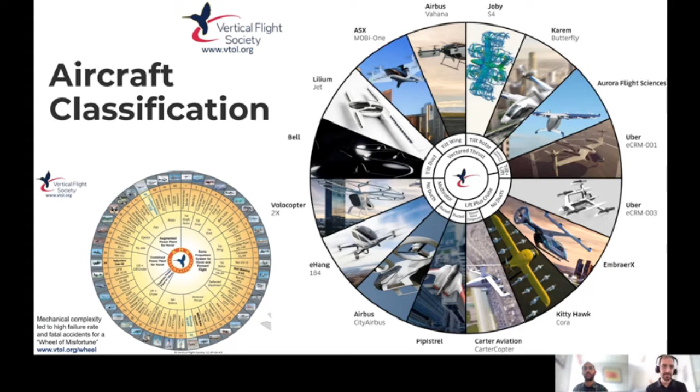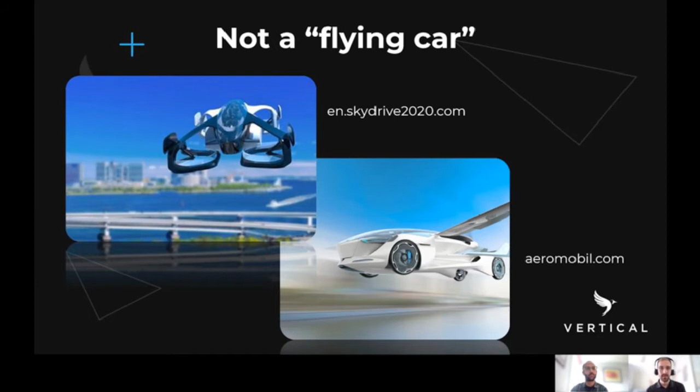So this is new, this is novel, and there are a lot of challenges ahead of us. I'm just going to quickly list down some of those challenges that are presented.

So the first one is public acceptance. There's potential that these things are noisy. There's the whole kind of not-in-my-backyard objections that you may get in areas where these aircraft are utilised quite heavily. And then there's the perceived safety - people aren't going to use these until they know that they're safe and proven to be safe.

Second area of challenges is around infrastructure. Do we need specific vertiports? Vertiports are kind of akin to a heliport, but have the specific charging needs for these. We know that electric cars are going to become ever more common, so we need a grid that can provide the power to charge these. eVTOLs are just the same - they need quite high power to enable quick charging.

And the third, and by no means least, is air traffic management. So the vision is that there's going to be lots of these aircraft flying around, so it's going to be potentially congested airspace. They need to share that airspace with existing users, and it's highly likely that there's going to be smaller autonomous systems, such as survey or industrial drones, acting in that same airspace that all needs to be shared. So we need this overarching air traffic management system to ensure these are safe.

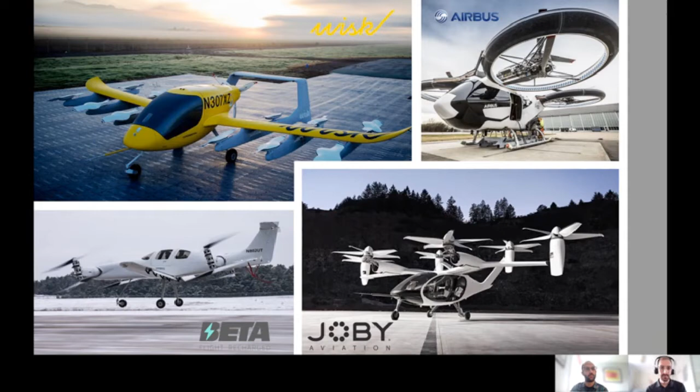You've got the shorter range, kind of more simple aircraft, which are potentially suited for intra-city - so that's really quite short range, not quite river hopping, but perhaps a more shuttle service. And then you've got the longer range aircraft, which tend to be winged for the increased performance in cruise - a bit faster, higher performing aircraft, but with that comes some complexity.

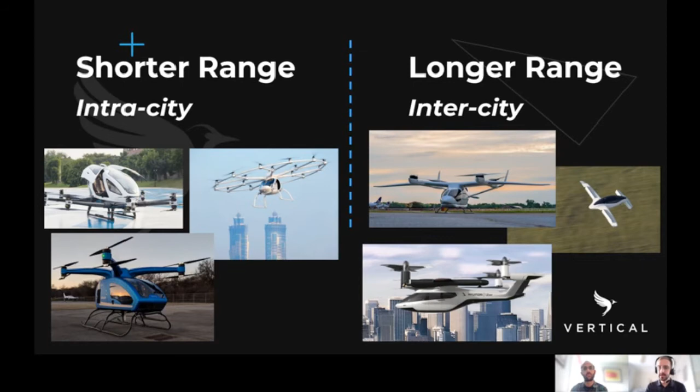So that's the kind of background and some of the competitors out there. I'll now kind of focus back to Vertical Aerospace. So I'm going to cover the journey so far.

So Vertical Aerospace has been going about 4.5 years, maybe a bit longer. James and I were fortunate enough to join very early doors, so we were employees number 4 and 5, started in 2016. Company was founded by tech entrepreneur Stephen Fitzpatrick, founder of Bristol-based OVO Energy. At the time that he started the company, he also had Manor Racing, the Formula One team.

And from his kind of involvement in the energy business, and particularly the renewables focus, and seeing some of the high power technology, particularly around the hybrid powertrains that were in Formula One, he wondered if they could be merged together to form a new method of transportation.

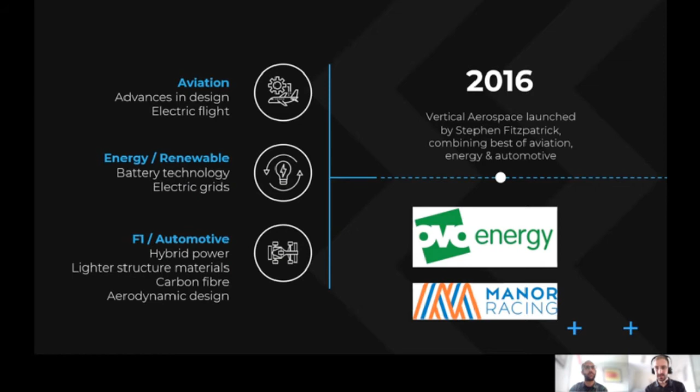So in 2016, we were set the challenge to make the first eVTOL aircraft for the company. That was called the POC, and I'll cover that in a little more detail. In 2017, we had its first flight. In 2018, we put a body shell on. The company was larger by that time, about 30 engineers rather than the 6 engineers who designed the POC aircraft. Then in 2019, we flew our second technical demonstrator, Seraph. Its internal name is HRD, so if I inadvertently refer to it as HRD, you'll know the aircraft I'm talking about.

In 2019, we were about 70 engineers. I'm not going to cover 2020 too much - I'll leave that to James to cover the next aircraft we've been working on. But I will say now we're over 100 employees, split across 2 sites in Bristol and Oxford. In 2019, we joined forces with Mike Gascoyne Industries. Mike's an F1 veteran and has brought a lot of F1 experience, supply chain, and ways of working into the company to enable us to move quickly with the newest technology.

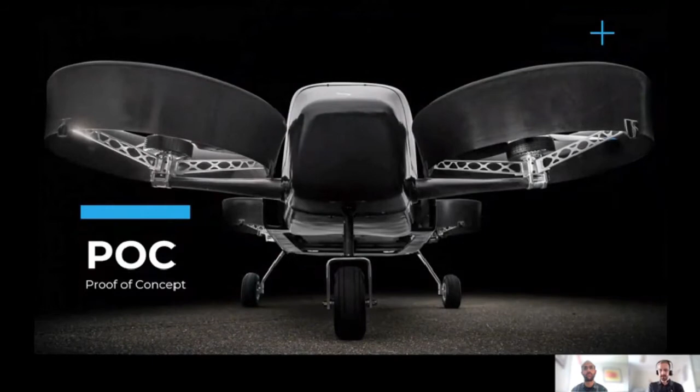So here's the POC, proof of concept is the acronym, and it was exactly that. There are 4 main reasons why we built the POC. One was technology readiness - just to understand if our battery's good enough, our motor's quick enough, to check the state of technology and its suitability. The next one is multi-copter scaling effects.

This is a really interesting one - small drones are highly maneuverable, large drones not so much. So we were trying to address some of those scaling challenges we might have, going from grams to single figure kilos to aircraft of a ton or greater. And how do the physics stack up?

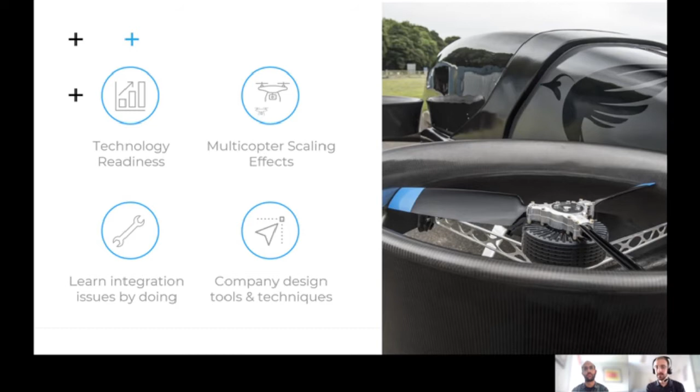The third point is learn integration by doing - it's often great to learn by doing. And then finally, to start developing the company's design tools and techniques. We were only six people at this time, but we had that eye for the future, knowing that we need to be designing a certified aircraft sometime down the line. So we needed to develop those ways of working.

So here's a cutaway of the aircraft, some basic stats. With its bodywork on, it was approximately 3/4 of a ton. It was powered, or lifted, by 4 off-the-shelf ducted fan units and motors and drive systems that were again all off the shelf. Now the battery was bespoke, so you can't get batteries of this size easily available as one-offs.

So we chose an unusual chemistry for this battery - lithium iron phosphate, which is great for power and great for safety. It's not so good for energy density, so we consciously made the decision to have a reduced flight time to ensure that, A, we could take off, and B, if we were to have an incident, it would be safer.

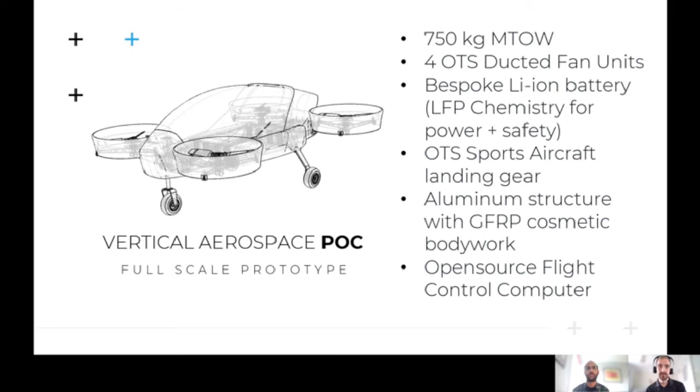The undercarriage, again, off the shelf from America, I believe. The structure was a welded aluminium space frame for lightweight. Later on in the flight test program, we installed a glass fiber cosmetic bodywork on it. And then finally, we used an open source flight control computer - prosumer grade flight control sensors that are readily available, with lots of good support as we needed.

So to talk through the test approach - fairly conventional product development cycle really. We did quite a bit of simulation up front, and some subscale modelling and rig testing. Then once we had the aircraft, we did some tied down testing, some loose tether testing, and finally some free flights of the aircraft. But it's not a purely sequential activity - we often looped around some of those as we learned.

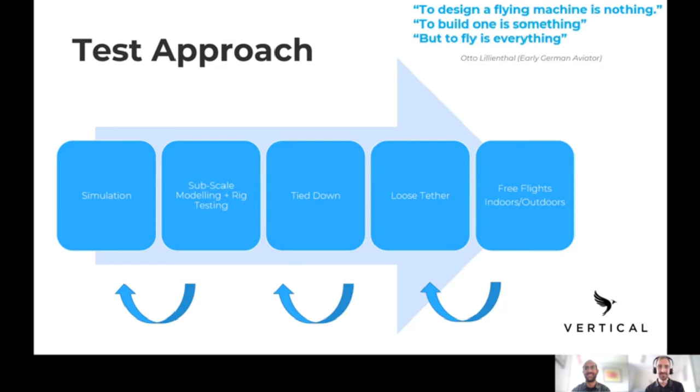So one of my favourite quotes is up here: 'To design a flying machine is nothing, to build one is something, but to fly it is everything,' from Otto Lilienthal. He did die in a hand-built glider, but it's still a really good motto there - the best way to learn is to build it and to fly it.

So here's one of the rig tests. We tested one of the ducted propulsion units, A, to check that it matched its claimed performance, and B, to look at some of the ground effects the aircraft may have exhibited. So we had the scaffolding rig to look at the performance at various different heights above the ground.

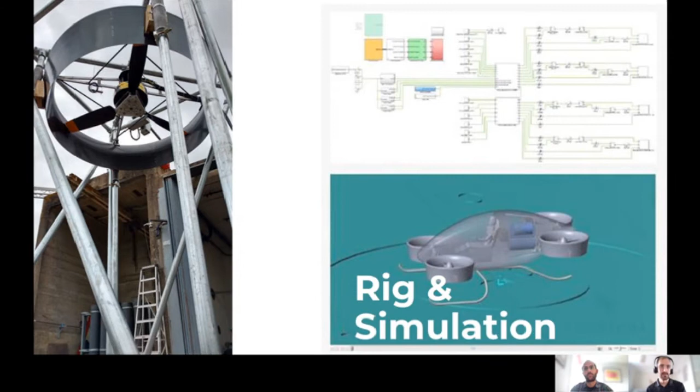And then there you can see some of our kind of Simulink modelling that was carried out to look at load cases, performance handling, and to be used for pilot training in some aspects as well. We did try to get the flight physics accurately captured, but we had some challenges getting the control laws into the simulation environment.

So we decided that performing a comprehensive subscale test campaign would be really valuable to tune the flight control laws. So here's, I think, our company's second drone. It's approximately 20% scale to the full-size aircraft, and we tried to target a similar centre of gravity, a similar undercarriage footprint, and get the thrust-to-weight ratios correct for both the whole aircraft and for each motor.

But our biggest concern was around responsiveness. I mentioned before the scaling - the inertia obviously scales quicker than the thrust for these vehicles. So we were finding ourselves phoning motor and motor drive providers saying, we need to slow down these motor control units, whereas people often phone up and say, hang on, we want it quicker to have our drone more nimble.

You can also see we've got this large kind of cruciform frame which we suspended masses on the end to again get that inertia really quite high, to replicate the motion of the larger aircraft.

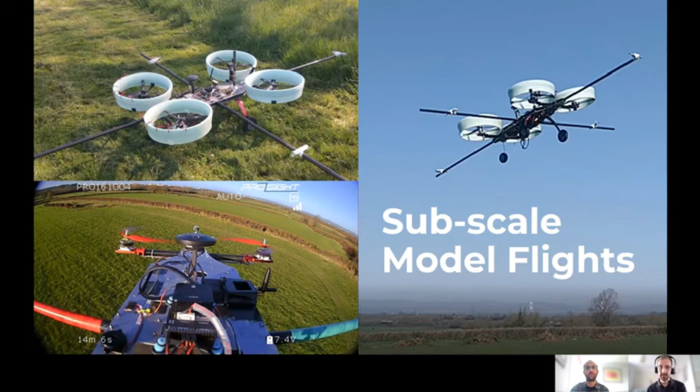And we performed these in both common throttle, so we coined this the term 'dumb hover', where you just command a common throttle to those motors. And then we did some intelligent hovering, where the flight controller is responding to those motions of the aircraft.

We did actually then venture and do a single degree of freedom tuning, where we constrained the aircraft so that it could pivot about its rear undercarriage, to assess that degree of freedom's control loop. Really quite invaluable - you get to stress test all the systems whilst being at a safe distance from the ground.

So off the back of that tether testing, when we had enough confidence that the aircraft would behave, we started the free flights. So we did this both indoors and outdoors, to escape the weather sometimes. And we did it with and without the cosmetic bodywork. That bodywork was actually quite heavy, so we had to kind of retune some of the flight control laws whenever we installed that.

So what did we learn? Summarising four big lessons learned from that project. One was around airframe deflections - these need to be considered. As the aircraft is stressed, it would obviously deform, resulting in different thrust vectors, which for a quadcopter like the POC can be quite significant.

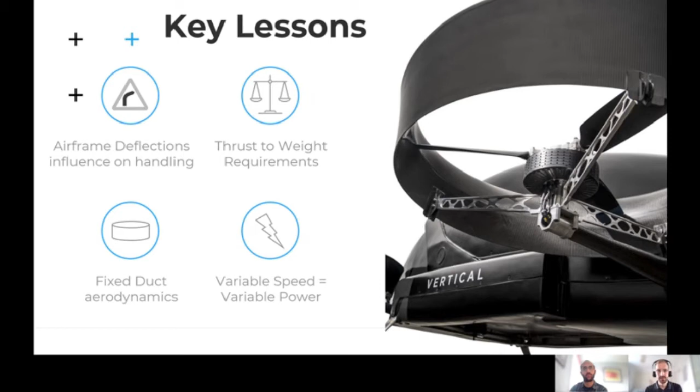So next I'm just going to show a quick video of the POC flying. This was flown at Cotswold Airport in Kemble. There is a longer video on YouTube - this is a short one.

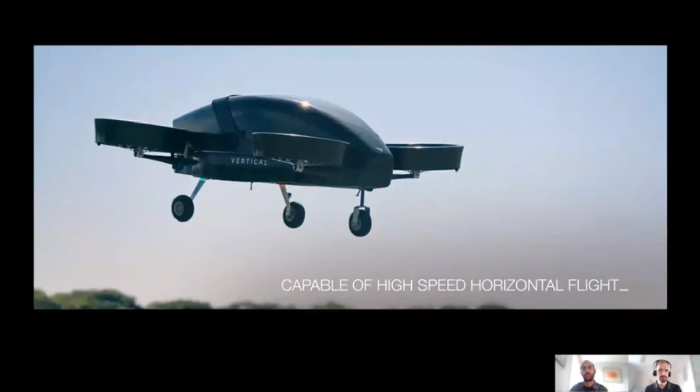Okay, so after the POC came Seraph, or its internal name was HOD, if I accidentally refer to it as HOD. So quite a bit different from the POC, yet still a multicopter.

So the key design differences: it had 12 rotors rather than 4. These were actually arranged in a hexcopter configuration, although those two rotors were overlapping and contra-rotating. We had a much lower disk loading, so we had more rotors, bigger rotors, giving us a payload capability, whereas the POC didn't have any.

And we really wanted to start exploring what it takes to make the low voltage, or the other power systems, redundant in the aircraft, because this is a must for certification. So again, it was an iterative step from the POC. This wasn't necessarily meant to be a product.

Arguably, it could be used for some autonomous cargo missions, or maybe that shorter range intra-city flight. But we still had our eye on a more performance-based aircraft.

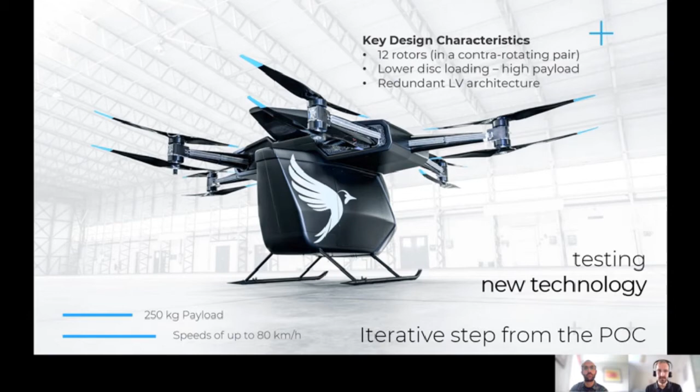So the four focuses of this one: one was to start understanding how open rotors behave, both dynamic vibrations, thrust performance, noise, etc. The second point is redundancy testing. This was what we referred to as the golden mission for this project, to prove that the aircraft was capable of safe continued flight with a motor failing. I'll talk a bit more on that later.

Payload capability - we have to have an aircraft with a payload capability. It's pretty obvious, and this was our first chance to look at the difference in flight behaviour with and without a significant payload. And this one's the same as the POC, but we needed to develop the company's design tools and techniques and provide validation data for some of the digital toolkits that we were using.

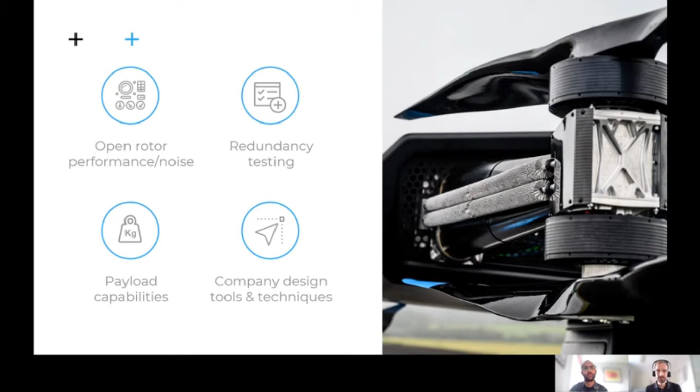Some people are quite surprised that we use wood. Why not carbon fibre? It's actually quite cheap and quite quick to get hold of these rotors, but it's also a really good material. It's got good damping properties and good damage tolerance. So the blades we selected for that reason.

So the flight controller issues a command - it wants this motor to particularly speed up. The motor in itself and the control unit there has its own control, closed loop control. So we needed to make sure that those two systems weren't fighting with each other. So we spent a lot of time ensuring that those motor units were tuned to really perform as expected.

On some of the earlier runs, we were seeing kind of steady state errors and creep in error over time, which wouldn't have been acceptable for flight.

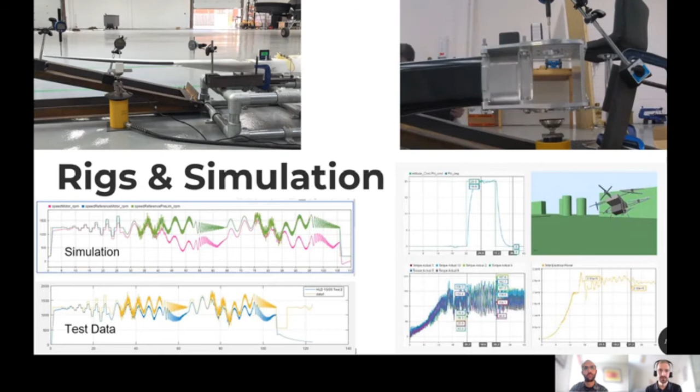So as before, tried to keep it as representative as possible. We put a data logger then on this scale aircraft, so we can actually extract some of that data and understand how those models compared to the real world performance.

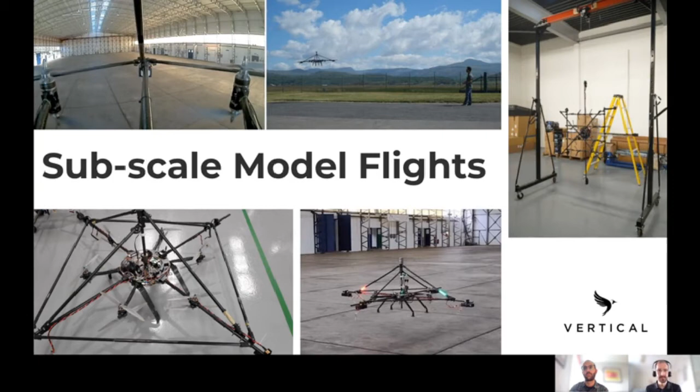And yeah, the drone's hanging there in that gantry, and that's just us measuring its moment of inertia for scalability reasons. So once the aircraft was then built, and Seraph was ready, we performed some tethered flights.

So on the left there, you can see a festive looking shot where we were tied down to the floor with some load cells. So we were again measuring the thrust margins that we had and the centre of mass.

And then we moved to Llanbedr in North Wales for our flight test venue, but we also did some tie down and some loose tether testing there.

So here you can see a video of the aircraft without its bodywork on. I think we had about 30 centimeters of slack in that test. So you can see that it's a little bit twitchy. It's quite a compromise.

You want to ensure that your tethers are loose enough so that they don't interfere with the flight control laws, and you don't get significant snatch loads which can confuse the control system. Of course the tethers are there to protect the aircraft, so you have to make sure it can't topple. So we went through a few different iterations of that tethering.

You might notice on this video that the top frame looks a little bit wobbly. Off the back of some of this testing, we did determine that we needed to make some structural reinforcement, which significantly improved the flight performance of the airframe.

Once we had the confidence we were ready to go, we incrementally started the flight test campaign. We started without any bodywork - it's the safest condition, there's less power required to hover, and we actually installed a stabilising platform. You can see there on the top left, just to give extra protection from any potential toppling issues.

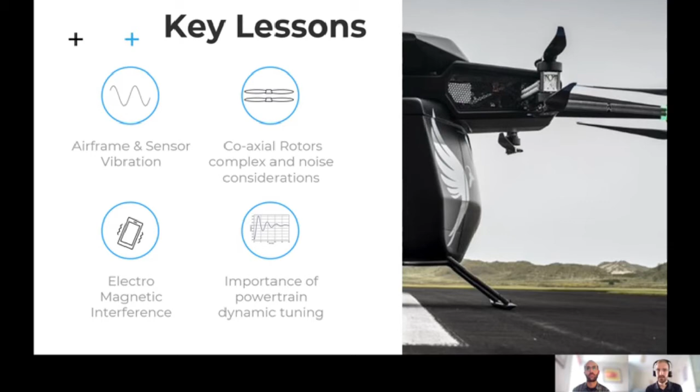But next I just want to show you an exclusive video that we've created to show one of the deliberate motor out cases we performed towards the end of the test campaign. Did this about a year ago, and again it was fortunate to have a sunny day at Llanbedr.

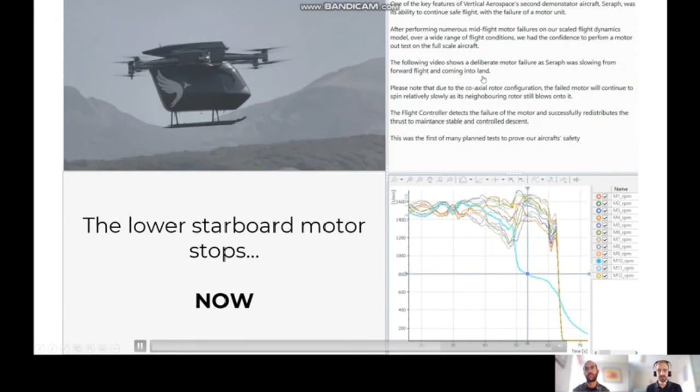So it happened in a few seconds. And it's about now that it's failed. So you can see it windmilling down. It never comes to a complete stop because it's still being driven by the rotor above it.

There's very few failure modes that would result in a kind of complete seizure of that rotor. But the key thing to observe here is that the aircraft carried on its flight. It was very undramatic, and the pilot still had sufficient control to bring the aircraft down on the runway.

We did quite a few of these tests. We did a lot more at scale through kind of more risky conditions, looking at all sorts of different permutations. But the main key here really was to get that experimental data to validate our methods.

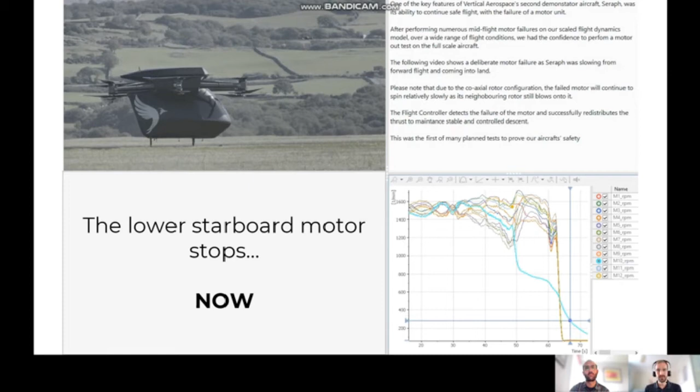So that was a very quick summary of where we've been and how the company was created, the market that we're looking to get into, and our two technical demonstrators. I'm now going to hand over to James Peck to talk about the future.

Great, thanks, Simon. Before I do talk about the future, I think it's worth looking back again at the timeline that was shared at the beginning of the presentation. Oh, there we go. Sorry.

Until recently, we've only publicly shared the work we've been doing on multicopters, but we've actually been working on winged eVTOLs for quite some time. Whilst we only unveiled the VA1X concept a few weeks ago, this is something we've been looking at for quite a few years. It was as early as 2018 when we first began investigating a winged eVTOL concept, and we began engaging with the EASA around October of that year.

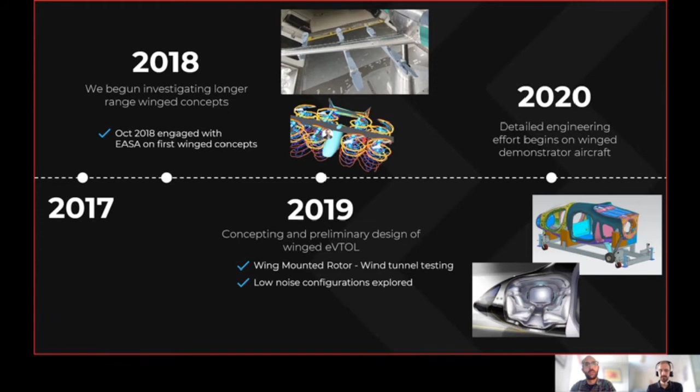We spent a long time exploring the design space, conducting wind tunnel tests of wing-mounted rotors, and a significant number of numerical studies to identify what the optimal configuration looked like. All of this was in parallel with the Seraph program. But in 2020, we began refocusing the majority of the engineering effort into designing our first winged eVTOL prototype. We're already a considerable way into the design of that aircraft, and we hope to show off the hardware for that prototype next year, along with demonstrating a first flight in the second half of the year. That will lead straight into the production aircraft and the certification program.

So why the shift away from Seraph? Well, Seraph satisfies a particular market, but not the urban air mobility market, and it's that market that we really want to target. The potential for urban air mobility is huge, even today, and it's expected to grow significantly more over the next 10 to 15 years.

Basically, cities are becoming larger, and there are a growing number of megacities around the world, for which the existing ground-based transport options are just proving inadequate. That's reflected in a recent resurgence of helicopter passenger flights in cities like New York, Mexico City and Sao Paulo. Incredibly, in Sao Paulo alone, there are already over 1,000 helicopter flights per day. And these are noisy, polluting vehicles based on a technology that hasn't really changed much in half a century.

Recent technological advances allow for far more efficient, cleaner and quieter vehicles to solve these problems. That opens up a potential new market where helicopters haven't previously been allowed because they've been less socially accepted due to noise. So what makes a good eVTOL concept that can compete in this UAM market?

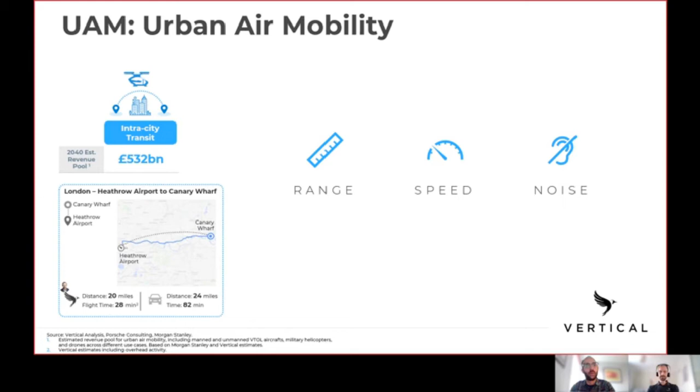I think Seraph was a fantastic learning tool, as Simon's pointed out, and its elegance and simplicity meant we could get that learning very quickly. But to enter into the UAM market, it became clear that we needed a different aircraft.

And at some point, that maximum takeoff weight becomes large enough that the batteries simply can't provide enough power to get you off the ground, and it's no longer feasible.

Now, for a conventional helicopter or a multicopter like Seraph, you'll struggle to achieve an L over D of much greater than 5, which with today's battery technology simply won't give you enough range to operate a UAM service. Conventional tilt rotors, whilst they're designed for speed and are more efficient than helicopters at that speed, still struggle to achieve a high L over D because they have heavy engines mounted on the wingtips, which puts structural constraints on the practical aspect ratios of the wings.

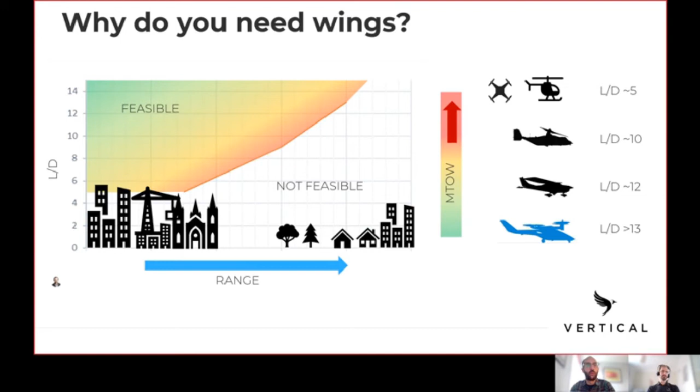A modern GA aircraft can achieve L over Ds of between 10 and 15, and that's around about where we're targeting. We're targeting L over Ds of greater than 13, and you can only really achieve this if you generate your lift from a wing during cruise, and ideally an optimized high aspect ratio wing.

So if winged aircraft are better, why isn't everyone developing them? Well, firstly, you have to carry the additional structural mass of the wing, and that can be quite significant if you intend to spend a significant time in hover. But provided your expected ConOps don't require you to spend long in hover, then the wing mass quickly pays for itself.

More importantly, though, to really gain that increased performance, you need to increase the complexity, such as having tilting rotors and aerodynamic control surfaces. That's a difficult trade because complexity drives cost, particularly in certification cost, which all needs to be accounted for in the operating models. So ideally, you want to end up with an aircraft with the best performance but lowest complexity, and that's what we've been striving for.

But despite best efforts, it's inevitable that this type of aircraft is going to be more complex than a simple multicopter. There's an assumption that some people make that simplicity equals safety, and therefore a complex aircraft will be less safe. Well, that's not always the case. Modern passenger aircraft are among the most complicated vehicles ever built, and they're also among the safest. That's because the safety has been architected into them. That's what we've been aiming to achieve. We've designed an architecture that has built-in redundancy and high reliability despite the complexity.

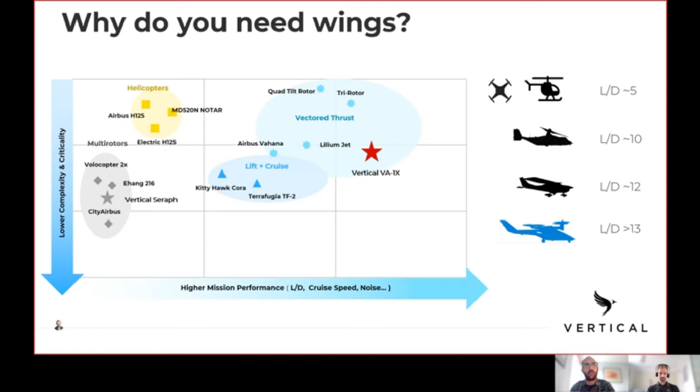That size is necessary to increase the disk area of the rotors, to reduce power and noise as mentioned before, and to increase the wingspan to maximize the aspect ratio. There is an upper practical limit on the size to allow continued operations from existing heliports, so the maximum footprint is still constrained.

We've got 8 rotors, 4 of which can be tilted for transition and cruise. From a redundancy perspective, we can tolerate any single failure, be it loss of thrust from a rotor, loss of tilt actuation, hard over control surface failures, or battery pack failures. We're in the process of generating the evidence to demonstrate this to the authorities at the moment.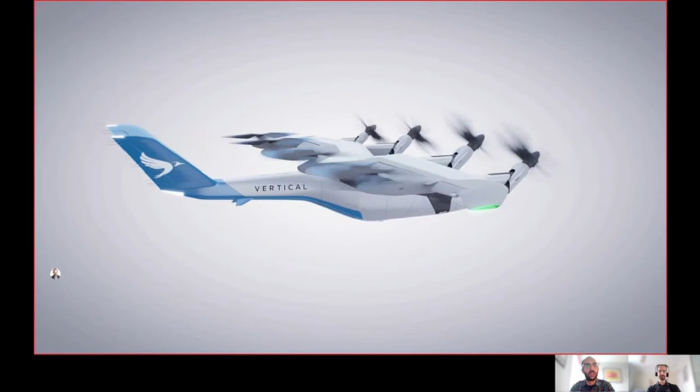You'll also notice that the aft rotors are actually 4-bladed scissoring. You might think this is unnecessary complexity, but again this comes down to the trade of performance versus complexity. In the case of a UAM vehicle, low noise is essential, and that drives the need for low tip speed, high solidity rotors that need to be multi-bladed essentially.

It's because of all this effort we've put into optimizing the aircraft - the wing loading, pylon size and shape, rotor positions and so on - that we can achieve an L over D comparable with a high-performing GA aircraft, which crucially gives us a viable mission range with today's battery technology. That's important because battery technology is not advancing as fast as many people would have you believe. Furthermore, it takes many years to get that battery design certified and onto the vehicle.

We've actually already begun that process, performing a number of drop tests and flammability tests that have been witnessed by EASA. Some of the key features you'll notice on the aircraft are we have a high wing and quite large doors. This is deliberate to make the vehicle more practical to use.

If you look at many GA aircraft, getting in and out is not that glamorous. We want a high throughput of passengers, and to make this accessible to all. Being able to get people in and out quickly and safely is again critical to this being a successful UAM vehicle. Now, hopefully that's given you a high-level insight into how we've arrived upon this aircraft.

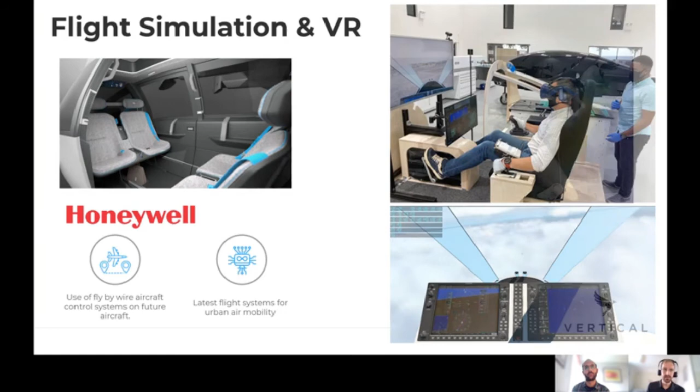Throughout this talk, we've talked quite a bit about noise and performance. One of the reasons we've changed to these, like James says, the highest solidity and low tip speed rotors is to try and minimise that noise. But there's some really interesting interaction effects with the wing and with the rearward rotor, so we're doing quite a bit of scale testing, quarter scale and somewhat full scale, to get an idea of some of these effects.

In our experience, we've found it's quite easy to get the performance of these, but to actually predict the noise is really quite different, so quite difficult. We've got a few tools and methods, but we're really trying to validate those experimentally so that we've got confidence that our aircraft will be quite smooth, with no induced vibrations to make the passenger experience not optimal.

So we've already started running some testing for this. It goes without saying we'll be doing some wind tunnel testing in parallel, and James showed some of the pictures earlier on for some of the wind tunnel testing we've done to date on previous concepts.

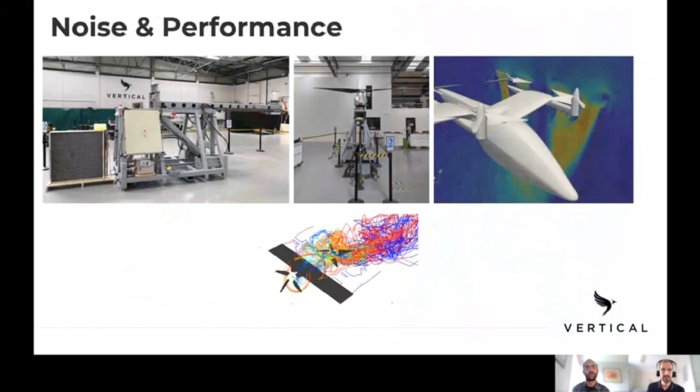Not much to report really on the test program. It's going to be pretty similar to POC and Seraph, although more complex - this is a more complex aircraft. We've got actuated systems that we need to study. The fact that we're considering a manned flight test aircraft as well means we really need to have absolute confidence in all the systems, so more structural testing of all kinds of composite joints, etc.

So rigs simulation, not just the pilot in the loop simulation, all the kind of battery thermal simulation etc. that needs to go on. We're putting a lot of effort to develop an automated system test bench, typically called an iron bird, an environment where we can change parameters and automate testing to really check that our systems, principally our avionics - that's where we're focusing initially - are behaving.

And then the flight test campaign, a little more complex this time, as the aircraft has 3 modes of flight. It's got the rotor-borne or multi-copter helicopter mode, and then the conventional or wing-borne flight. And the third stage is that boundary during transition, where you traverse from one flight mode to the other. We really need to be incremental and ensure that when we attempt our first transition, we've got full confidence that it will be a success.

That's the test program in a very, very brief nutshell.

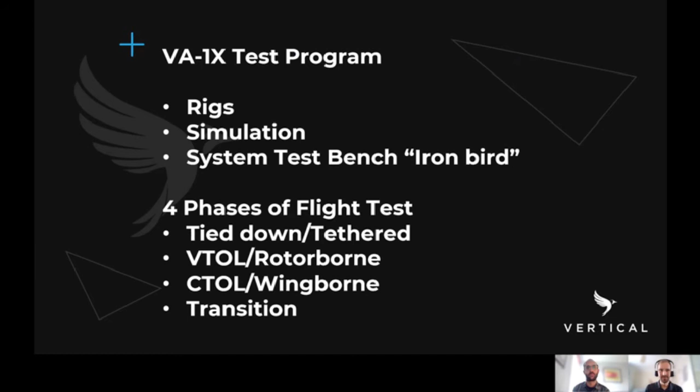Great, okay, so that ends the session. That was a really rapid run through of the market, the company, our previous technical demonstrators, and our next aircraft. I'm going to be around to answer any questions you may have. I'll try my best to answer them, but it's a pretty multidisciplinary area that we're after here.